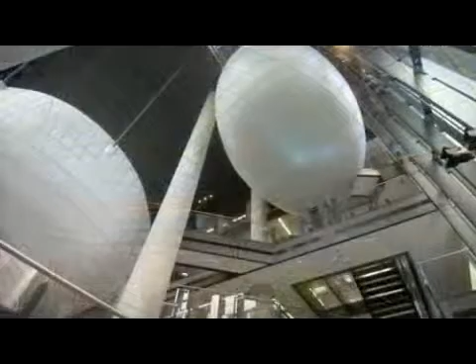To make objects that are currently manufactured in conventional factories will extend that whole idea into virtually every solid thing that we have in our homes. The introduction of highly sophisticated computer modelling technologies has meant that designing the shape and form of a building is now only limited by an architect's imagination.

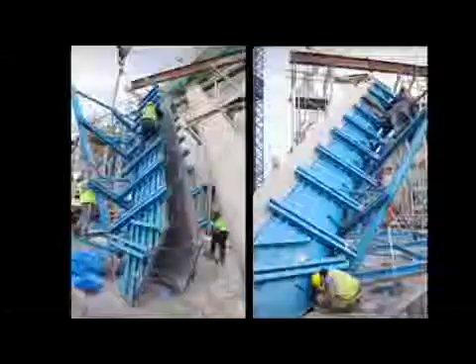Leading architectural practices such as Foster & Partners are designing buildings to a level of geometrical complexity unheard of 10 years ago. However, while these forms can often be achieved through off-site factory-based manufacturing techniques, there are significant limits to the levels of intricacy attainable. For example, pouring concrete into a framework can go some way to fulfilling these ambitions, but the reality is that the achievable complexity is still limited.

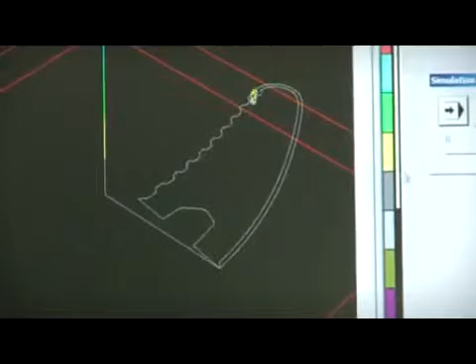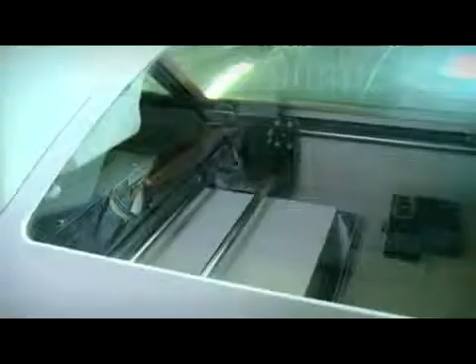The manufacturing processes required to turn these complex building designs into reality have remained elusive until now. This may be about to change if current research by scientists at Loughborough University comes to fruition. The research group has been inspired by 3D printing, an additive manufacturing process. Here, information created from computer-generated models is exported to a machine which then builds up a model or a component, layer by layer. The virtual model is, in effect, materialized.

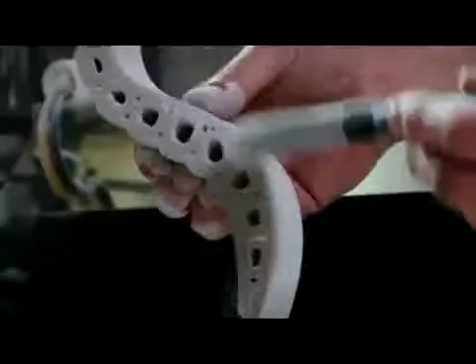At Loughborough, instead of using powder and glue, they are experimenting with concrete to create large-scale building components. The research here at Loughborough University gives us tremendous opportunities. We are able to have a little peek into the future to see what construction technology will be in the next 5 or 10 years.

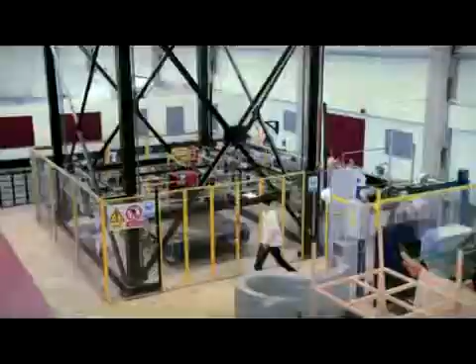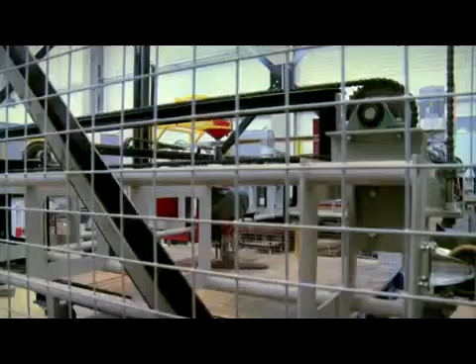Concrete printing works on the basis of a highly controlled extrusion of cement-based mortar, which is precisely positioned according to computer data. The process has the potential to create architecture that is more unique in form, but crucially, components do not have to be made from solid material, and so can use resources more efficiently than traditional techniques.

We have shown how additive manufacturing can be developed to create large structures such as panels and walls, with precisely controlled voids within them. For example, the section which you can see being manufactured here could incorporate all the service requirements of a building, such as pipes and cables, in one unit.

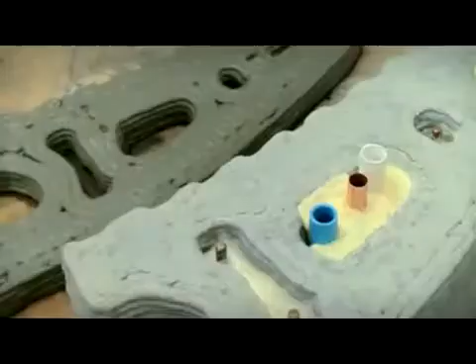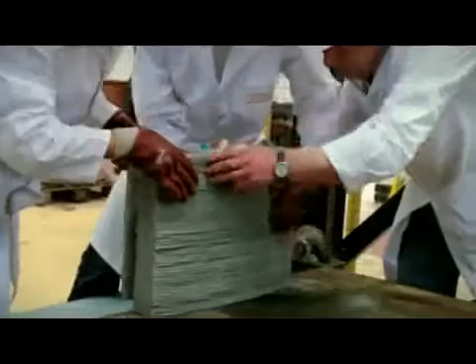This process is capable of producing building components with a degree of customization that's not yet been seen. It could create an era of architecture that's adapted to the environment and fully integrated with engineering function. Imagine whole sections of a building being printed and then assembled on site with their service provision already installed.

The Ultra PRT, short for Personal Rapid Transit, is basically a taxi crossed with a metro with none of the disadvantages. I just thought transport was not done well. And I believe that if we thought about transport in a proper way, we would come up with a better way of doing it. And this is the result of that process. Adam Ruddle, the PRT's lead engineer, explains how it works.

The passenger is going to come to the station, buy his ticket, and then when he gets to the vehicle, he will select the journey that he wants. He'll get into the vehicle. The vehicle will now be told by a central computer where it's going to. The vehicle then completely autonomously drives you from your start to your end station without stopping anywhere along the way in between.

The vehicles that are going to a station will drive away from the main guideway into the station area. That means everybody who isn't going to that station carries on along the main guideway at the full speed of the vehicle. That way, you travel very quickly from your start to the end of your journey and are not delayed by anybody else's travel whatsoever. It's quick, it's safe, it's easy to use, and it's pretty cool to look at.

The Ultra PRT may just be the answer to India's heavily congested and potholed streets, and given how little it costs to build and how quickly it can be built, it may soon be headed to a neighborhood near you.

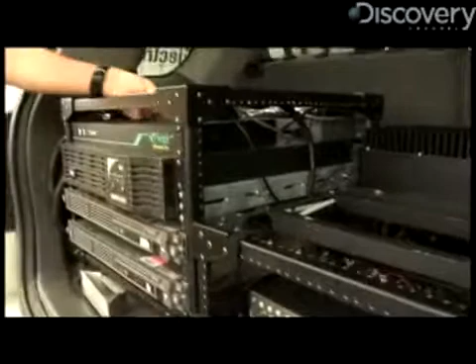So we've reached the end of this road segment and turning around. This is not a pre-programmed move. Depending on the geometry of the road or anything else here, it'll adjust to figure out the best way to go back and forth. So how does it work? A complicated system of navigational devices, cameras, and scanners.

So there's a total of 7 mounted on the vehicle. There's 3 at bumper level. So what this is doing is it's sending out laser beams and scanning all around the car about 12.5 times a second. So these are looking for other cars, they're looking for people, they're looking for trees, any sort of other obstacles that you might find.

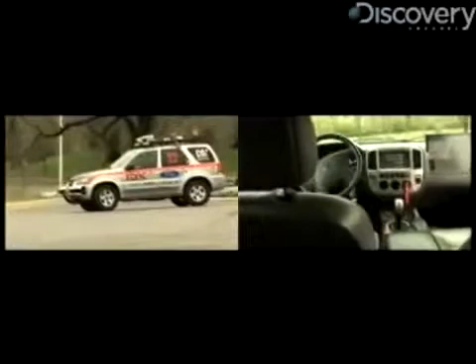The 2 on the front are looking down at the road. So they're looking for where the road is, where curbs are, where very small obstacles are, where potholes are, things like that. So how many decisions is this car making per minute or per second while it's driving? It's recalculating its path about 10 times a second.

The first thing you have to do is press this main button here, which switches on the system, and you have the ACC and LCAS buttons being enabled. We then set the adaptive cruise control, and you can increase the speed in multiples of 2. So here we are, I've set it at 68 miles per hour. You can see and identify a vehicle in front, and it is keeping 2 chevrons behind that lorry.

And then with this button here, you can change the distance between you and the car ahead to effectively 3 chevrons, 2 chevrons, or 1 chevron. Then if I press this button here, the LCAS button, the camera now starts to see the lines in front, and I can feel the response.

You'll see the steering wheel actually turning itself from the camera, monitoring the road ahead, watching the bends, and then feeding that input into the steering wheel. Now if I were to totally let go, which is obviously illegal, so I have to be very careful here, what the system does is it recognises that there's no steering input from me whatsoever, and after 10 to 15 seconds it would beep to say, look, I'm turning myself off, ultimately you're the driver, you're responsible for this car, this is just an assistance package.

And there we go, it's just beeped, and I have to hold onto the steering wheel. It can feel that I'm now back in control of the vehicle for it to re-engage. Now this car is about to pull ahead of me. The system detects it, and I'm now starting to brake without me touching anything to keep a safe distance between this car and the car ahead.

Now interestingly enough, I'm set to 68 miles an hour, but you'll see from the speedo that we're actually doing 55, because it says in order to stay in this lane and keep a safe distance from that car, I will have to reduce the speed accordingly. So what this means over a long journey, it effectively means that you've got somebody else supporting you, which means that you're more alert, it's less tiring over a long drive, you can look around more, check your mirrors more, and be more alert to drivers on the road.

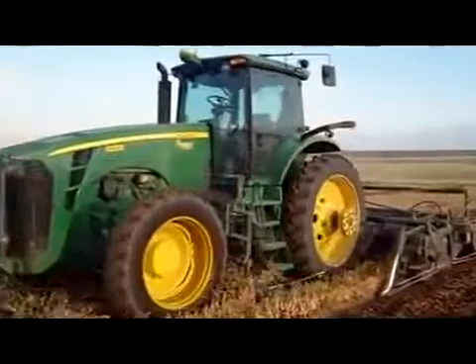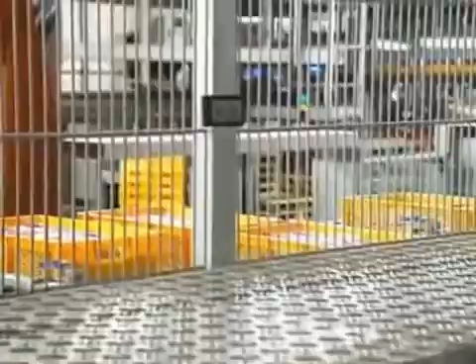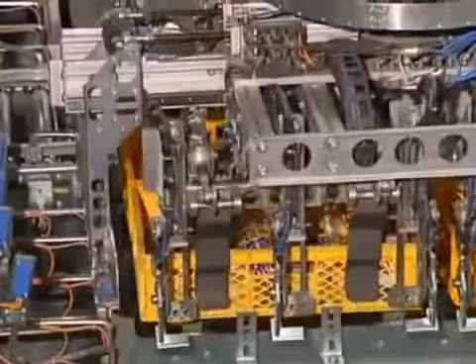Replacement of human labor with machines. At the core of the economic system itself is the mechanism of labor for income. Our entire economic system is based on human beings selling their labor as a commodity in the open market. If humans do not have the option to work for a living, then the monetary system as we know it is over. No one can buy goods if they don't earn money. Companies cannot afford to produce if the consumer has no purchasing power to buy anything.

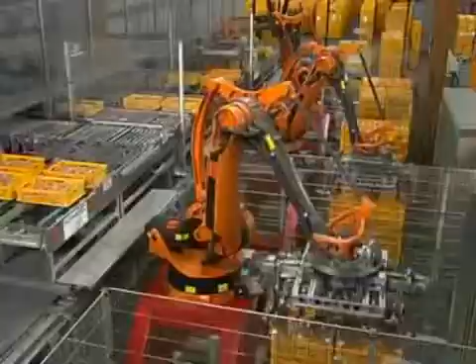As John Maynard Keynes disdainfully pointed out, we are being afflicted by a new disease of which some readers may not yet have heard the name, but of which they will hear a great deal in the years to come, namely technological unemployment. This means unemployment due to our discovery of means of economizing the use of labor outrunning the pace at which we find new uses for labor.

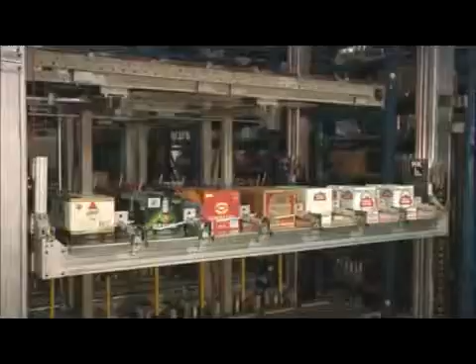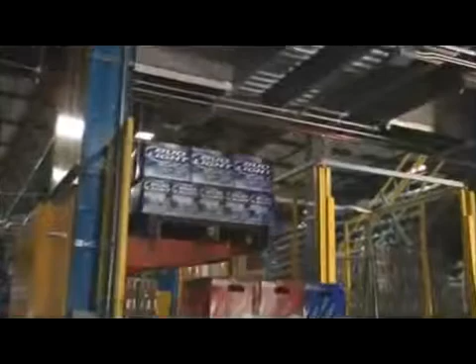While politicians, business leaders, and labor leaders bicker over issues they claim are responsible for the growing unemployment in the world, such as foreign company outsourcing or immigrant labor, the real cause is going unaddressed in the public debate, and that is technological unemployment. Since market capitalism is built upon the logic of reducing input costs to increase profits, the inclination to replace human labor whenever possible by machine automation is a natural progression of industry. After all, a machine doesn't need to take breaks, it doesn't require health insurance or benefits, and it isn't a part of a demanding labor union.

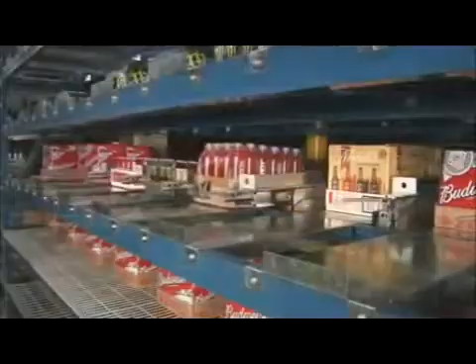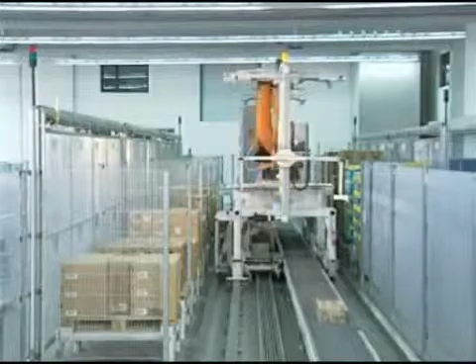A simple glance at U.S. historical labor statistics by sector shows the pattern of machine automation replacing human labor definitively. In the agricultural sector, almost all traditional workflow is now done by machine. For example, in 1949, machines did 6% of the cotton picking in the South. By 1972, 100% of the cotton picking was done by machines. In 1860, 60% of America worked in agriculture, while today it is less than 3%.

When automation hit the U.S. manufacturing sector in the 1950s, 1.6 million blue-collar jobs were lost in 9 years. In 1950, 33% of all U.S. workers worked in manufacturing, while by 2002 there was only 10%. The U.S. steel industry from 1982 to 2002 increased production from 75 million tons to 102 million tons, while the steel workers employed went from 289,000 to only 74,000. In 2003, a study was done of the world's largest 20 economies, ranging from the period of 1995 to 2002.